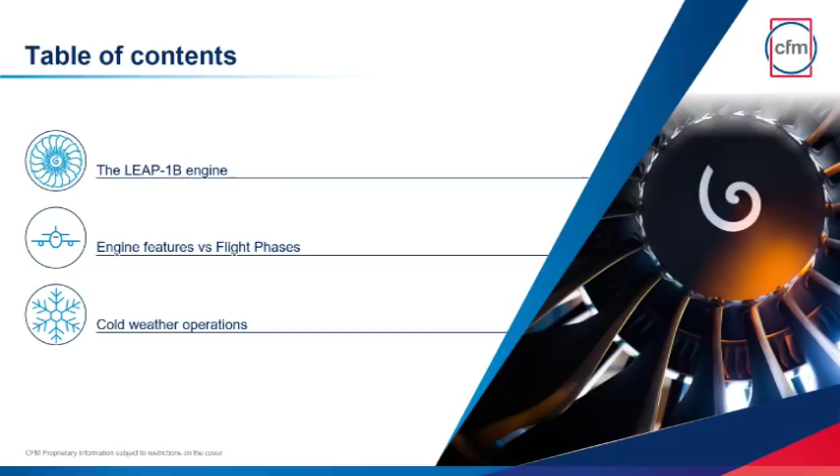Welcome to the LEAP-1B. The LEAP-1B gives its thrust to the 737 MAX family of aircraft. In this document, you'll find pilot-oriented operational explanations and tips to familiarize yourself with this new engine. We will go through the following topics: the LEAP-1B engine, engine features versus flight phases, from pre-flight phase to engine cool-down, cold weather operations. Let's begin with a short technical review.

Fuel burn. The B737 MAX has been designed to reach close to minus 15% fuel burn compared to the NG family. This target has been achieved thanks to design improvements made to the airframe, but most of it is due to a new generation of engines, the LEAP-1B family. On top of that, NOx emissions have been lowered by 50%, and the noise footprint reduced by 75%.

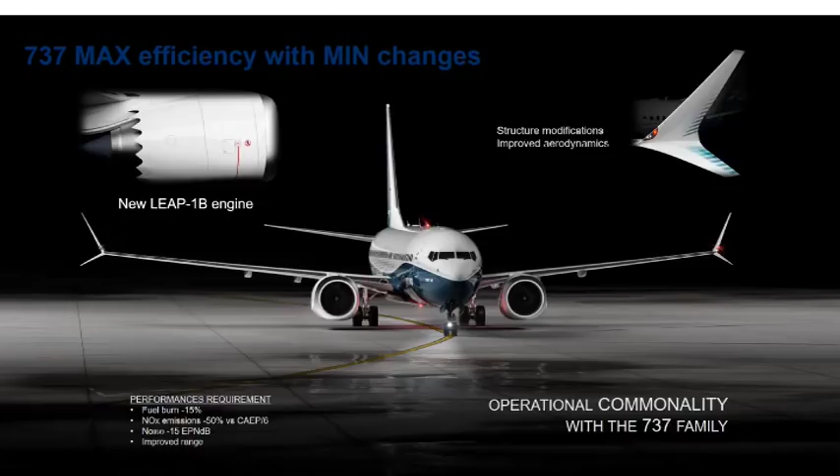From the outside of the aircraft, the LEAP-1B is bigger than a CFM 56-7B. The jet intake is 1.76 meters wide, which is 20 centimeters bigger than the one on the CFM 56-7B. The ground clearance is 43 centimeters, which is compliant with all the certification rules, and does not induce any limitations in bank angle for landing. Even in the case of a landing with the nose wheel retracted, the engines will not touch the ground.

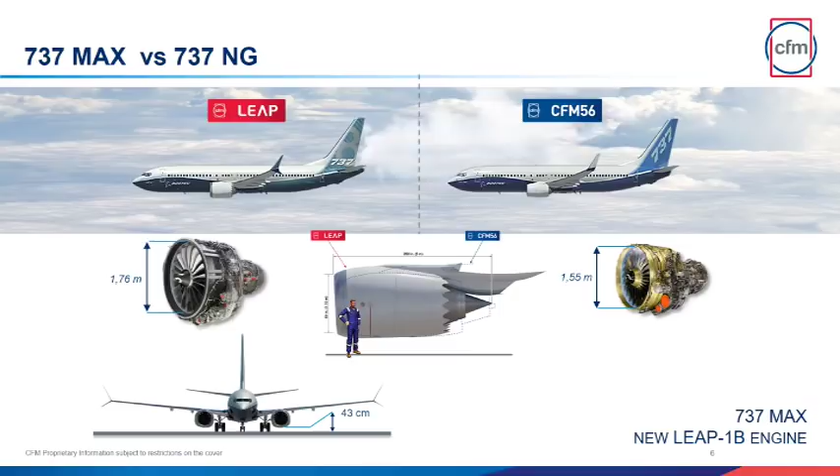The improved fuel efficiency of the LEAP-1B engine is due in part to its larger fan. The LEAP's new bypass ratio is 9:1 compared to the 5:1 bypass ratio of the CFM 56-7B. The larger bypass ratio is responsible for 50% of the LEAP-1B's gain in fuel efficiency.

The LEAP HPC's pressure ratio is now double that of the CFM 56-7B. It has increased from 11:1 in the -7B to 22:1 and is responsible for the other 50% gain in fuel savings.

The N1 red line on the LEAP remains around 104% N1, but the actual shaft speed has changed. Red line N1 shaft speed for the LEAP is 4,586 RPM, while red line N1 shaft speed for the -7B is 5,382 RPM. In contrast, the N2 red line has been increased to 117.5%, which equates to a mechanical speed of 20,171 RPM, much higher than the 15,183 RPM of the CFM 56-7B.

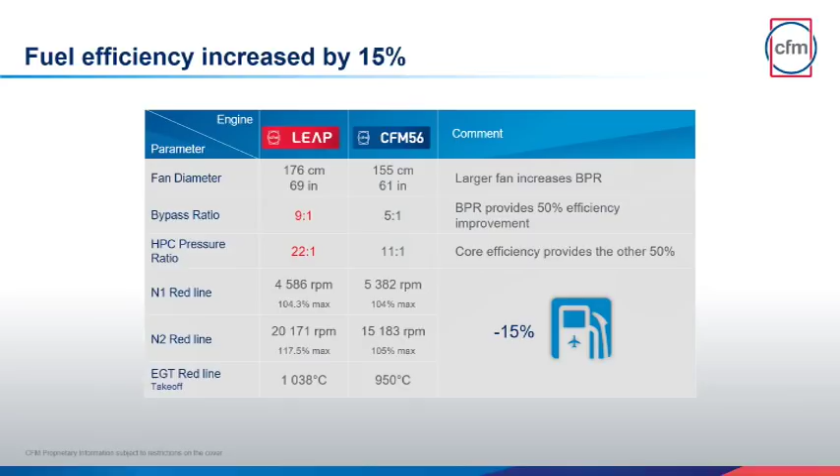Aft of the fan, the majority of the air flows into the secondary airflow, where approximately 80% of the engine's thrust is developed. The remainder of the air passing the fan enters the engine's core, becoming the primary airflow.

Primary air flows into the three-stage low-pressure compressor, also known as the booster. Between the booster and the high-pressure compressor are the variable bleed valves, or VBVs. The VBVs are designed to avoid stall occurrences in the booster by discharging a portion of the booster's air into the secondary airflow, while the engine is operating at low RPMs or during sudden RPM changes.

The VBVs open into the primary airflow and behave like scoops, catching any foreign objects that could have been ingested by the booster and evacuating them into the secondary airflow, bypassing the engine's core.

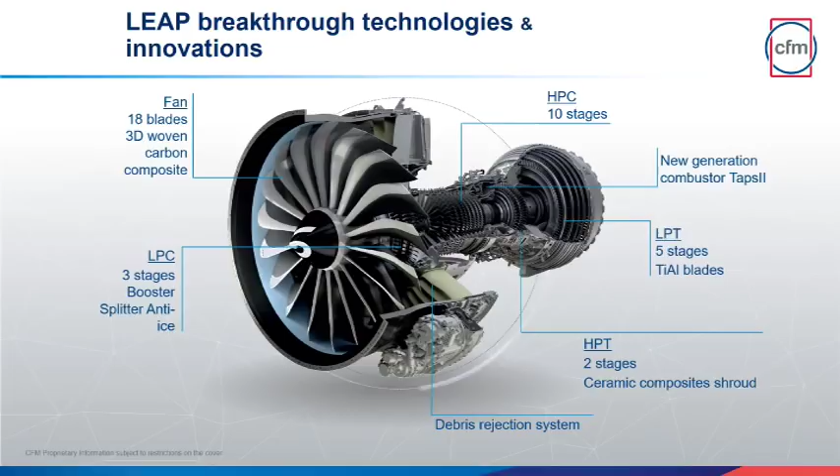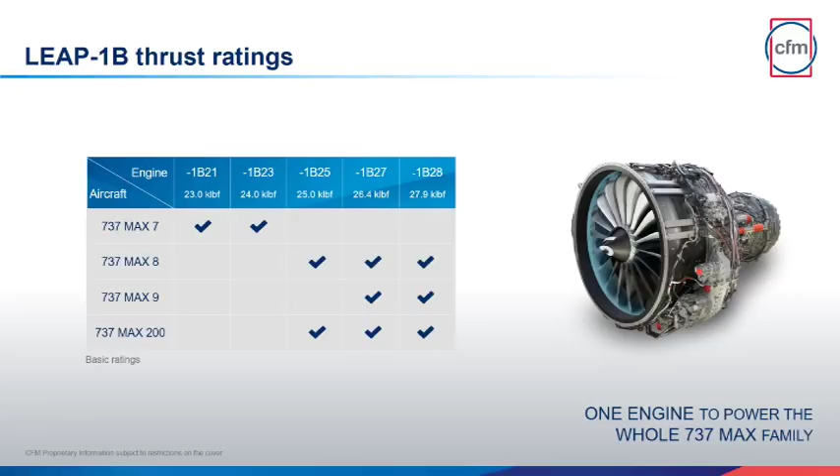The LEAP 1B family of engines provides a range of thrust from 23,000 pounds to 28,000 pounds. The only difference between these engines is the delivered thrust. The hardware is the same, but the ID plug is different. The ID plug is an electronic device plugged into the engine's FADEC computer that changes the operating characteristics of the engine, resulting in changes to its maximum thrust output.

Engine protections. The engine control is called FADEC, for Full Authority Digital Engine Control. Beyond basic engine control, the FADEC also actively protects the aircraft.

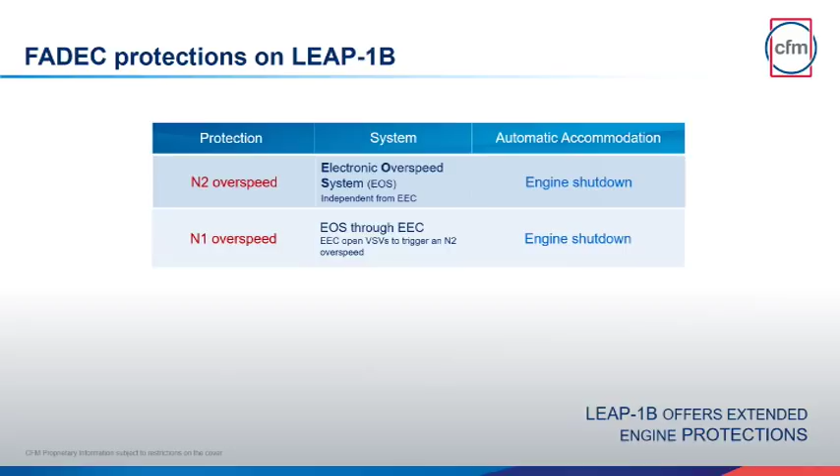In case of an N2 engine overspeed, an electronic overspeed system, EOS, independent from the main engine calculator, will command an engine shutdown to prevent it from bursting. In case of an N1 overspeed, the main calculator will detect it and will trigger the EOS, resulting in an engine shutdown as well.

Furthermore, to satisfy certification rules, the engine is equipped with a Thrust Control Malfunction Accommodation Device, known as TCMA. In case of an abnormal uncommanded engine acceleration, to avoid any lateral loss of control due to an excessive thrust dissymmetry, the TCMA will command an engine shutdown on the engine that is not responding normally. This device is only active during takeoff and touchdown phases when on the ground.

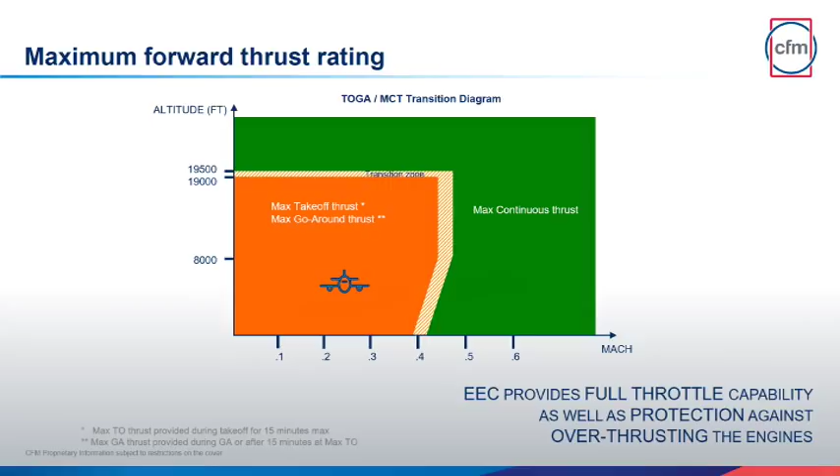Within the orange envelope, 15 minutes after takeoff, the maximum available thrust will be reduced to max go-around thrust, whatever the thrust lever position. This happens in order to protect the engine from experiencing too long of high power demand.

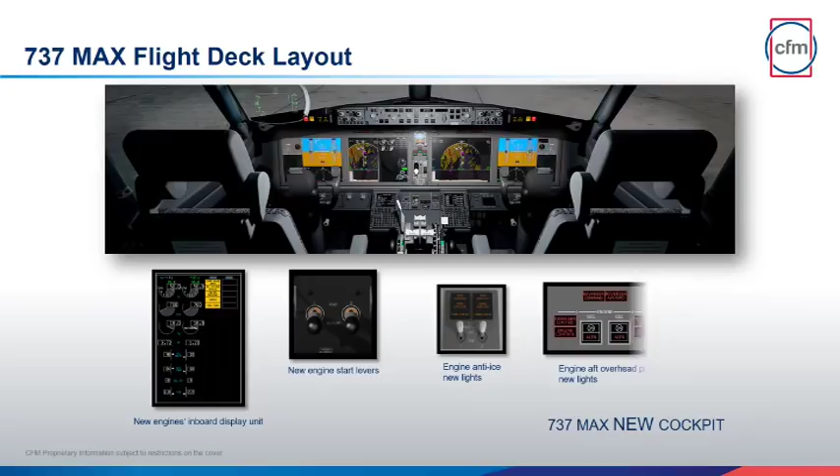New engine features versus flight phases. Pre-flight. On the flight deck, you will find a new engine inboard display unit, new engine start levers, new engine anti-ice panel, and new aft overhead engine panel lights.

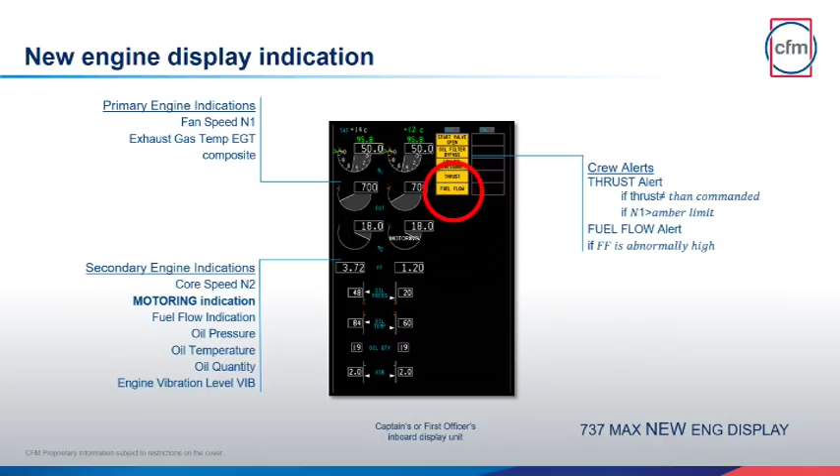On the engine parameter display, you will find two new lights. The thrust alert light, which will light up if the thrust is different from the commanded thrust, or if the N1 goes above its amber limit. And the fuel flow alert light, in case of an abnormally high fuel flow.

The engine start levers are equipped with a red light which will illuminate in the event of an engine fire or during an engine fire test.

The engine panel is also equipped with new lights. The reverser command light will illuminate if the reverser lever is not down in flight. The reverser air-ground light will announce the air-ground reverser logic has failed. And the reverser limited light will illuminate in case of an inhibited or idle-limited reverser.

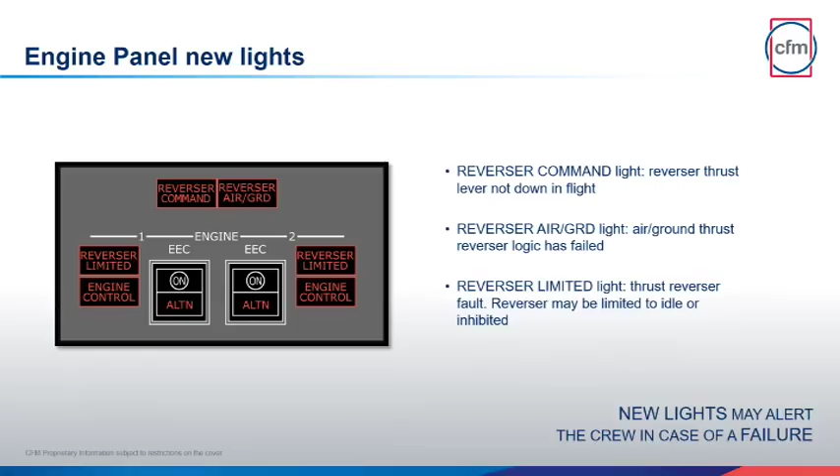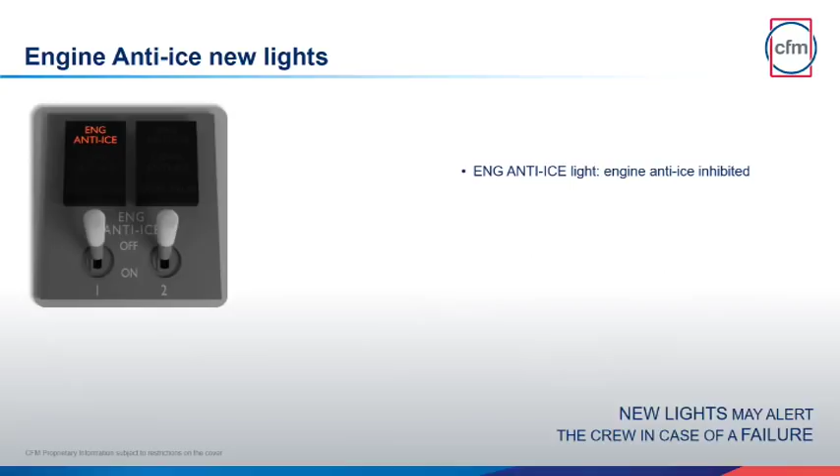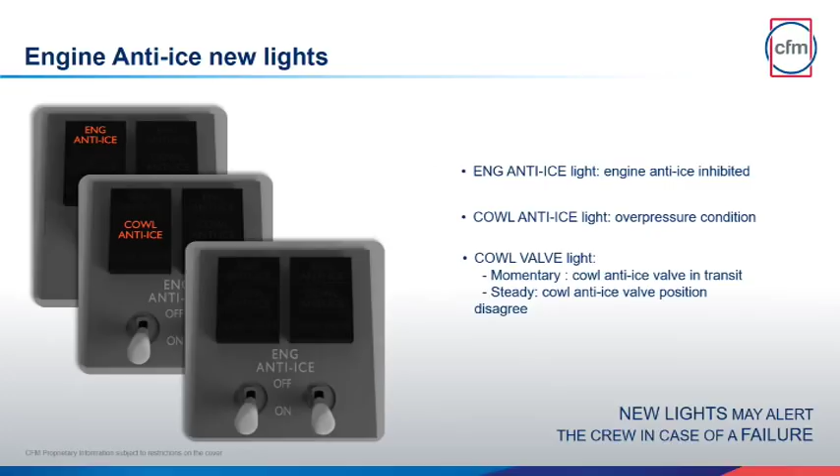The engine anti-ice panel is different from the one installed on the NG. All lights are amber. The engine anti-ice light will illuminate if the system is inhibited. The cowl anti-ice light will announce an overpressure condition. And the cowl valve light will illuminate when the cowl valve position disagrees with the switch position. Thus, it will momentarily illuminate when the related switch is moved, indicating a transient condition.

Exterior inspection. Now, let's go through a visual tour of the LEAP 1B.

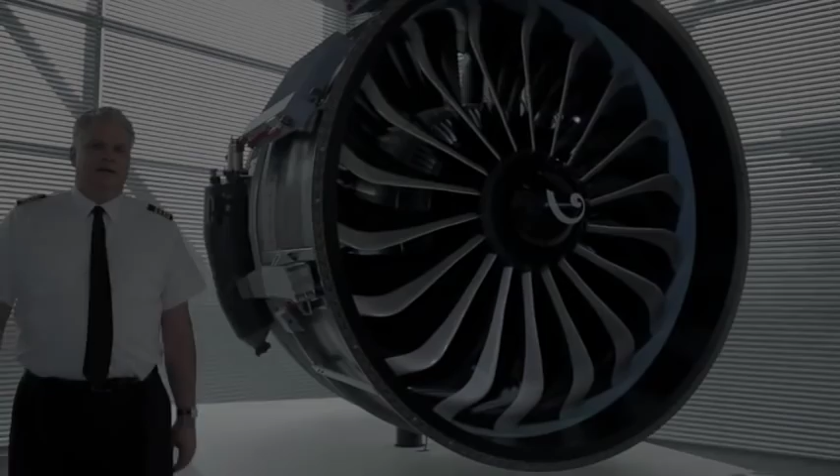Dear flight crews, you're about to operate the LEAP 1B engine on the 737 MAX family of aircraft. As this is a completely new motor, CFM wants to share with you some nice-to-know visual clues which will help you understand what you may encounter during the pre-flight visual inspection of your engines. These tips are intended to increase your knowledge of engine characteristics, thereby avoiding unnecessary maintenance actions and delays. Let's go for a short LEAP 1B visual tour, ready to fly.

In front of the engine, some details may catch your attention, especially on the front spinner, the fan blade platform edges, the fan blade tips, and the fan abradable.

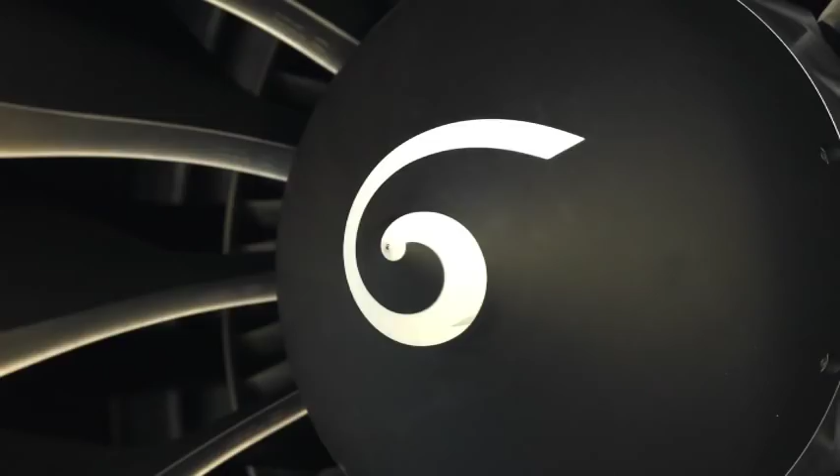You may observe some paint peeling on the front spinner. The paint peeling is due to erosion or foreign object damages, also called FOD. With paint peeling on the front spinner, the engine is perfectly serviceable.

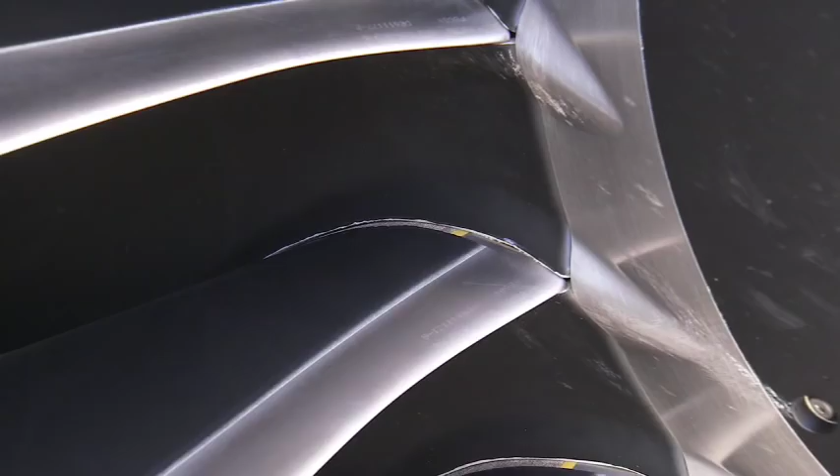You can go. On the fan blade platform edges, you may observe some irregularities. Those irregularities are due to the manufacturing process. With fan blade platform irregularities, the engine is perfectly serviceable.

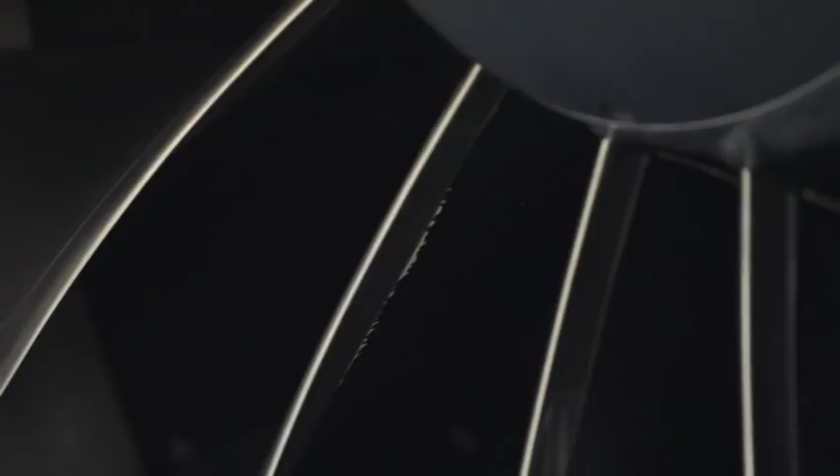You can fly. You may observe some paint peeling on the fan blades, especially on the rear side of the blades. This paint peeling is due to natural erosion. With paint peeling on your fan blades, the engine is perfectly serviceable.

You can go. Looking at the fan blade tips, you will notice a slight crease at the junction between the titanium leading edge and the body of the blade. This crease, more or less visible, exists on any blade and is due to the manufacturing process.

The engine is perfectly serviceable. You can fly. On the fan blade tips, you may observe some white dust. This dust comes from the abradable and is due to the normal breaking-in process of new production engines. With this white dust, the engine is perfectly serviceable.

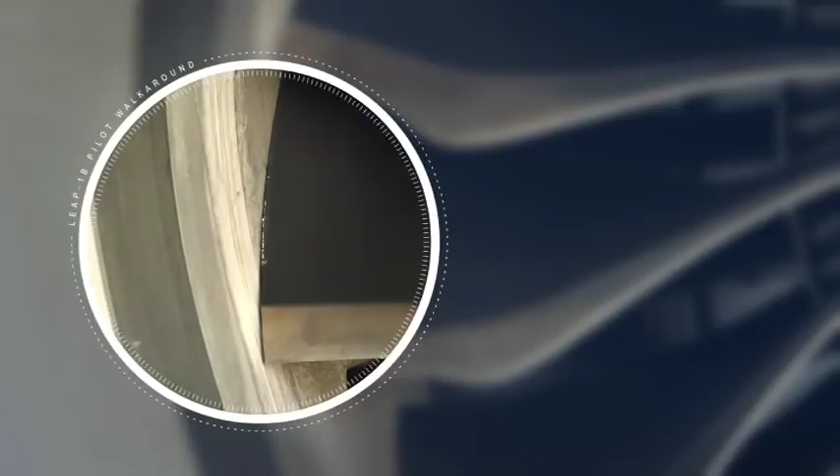You can fly. You may also notice some deteriorated fan blade tips with melted resin and sometimes visible frayed carbon fibers. This deterioration is due to contact between the fan blade tip and the surrounding abradable during the normal breaking-in process of new production engines. With this kind of deterioration, the engine is perfectly serviceable.

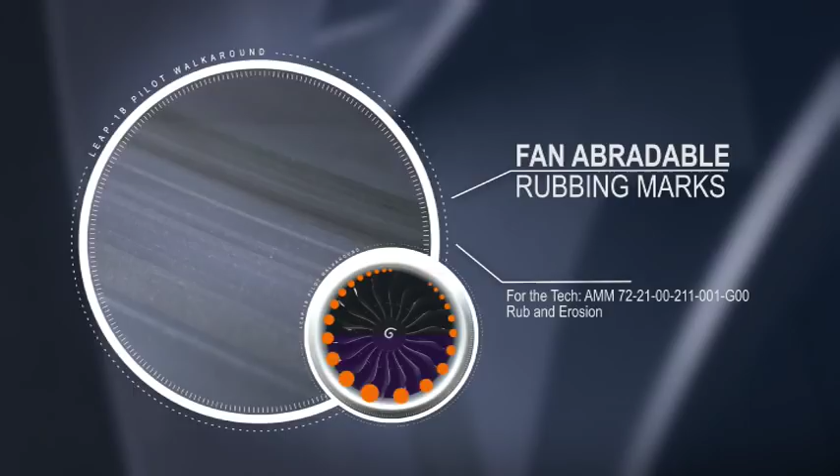You can fly. On the light gray color of the fan abradable, you will notice rubbing marks. The color of the rubbing varies from black to light gray. Furthermore, most of the rubbing will be located, although it may not be limited to, the 6 o'clock position. Those marks are due to the normal breaking-in process of new production engines. Whatever the color or location of the rubbing, the engine is perfectly serviceable.

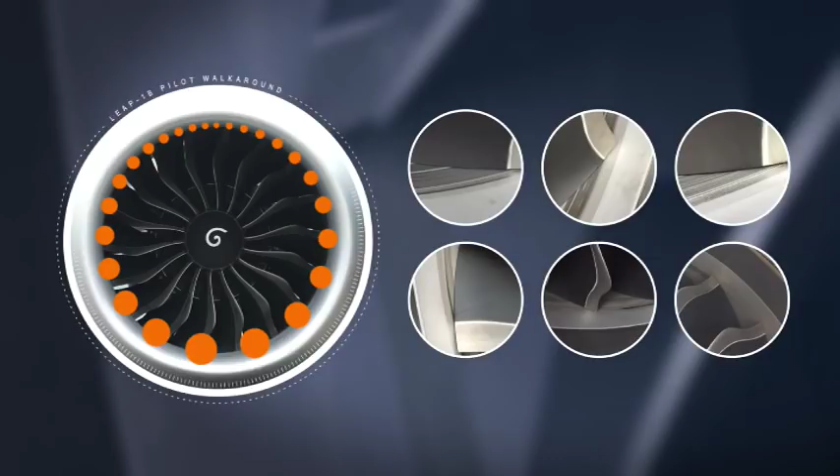You can fly. Looking at the fan abradable, you may notice some cracks. As long as those cracks are axial cracks that just look like a fine axial line on the surface of the abradable, the engine is perfectly serviceable.

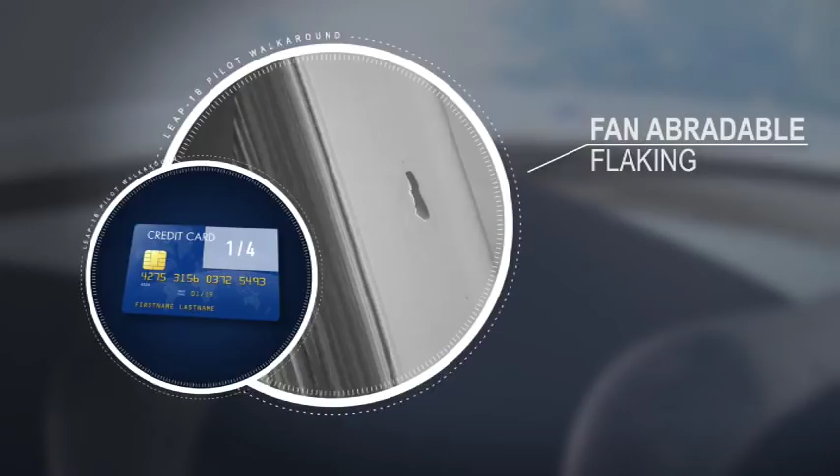You can go. When you have a close look at the fan abradable, you may notice some flaking in the material. This flaking, or presence of small craters, is due to the presence of little air bubbles in the material, or FOD. If the surface of the missing material is larger than 1/4 of the surface of a credit card, or if you can see the structural carbon fiber of the composite fan case, ask a technician.

The technician will refer to the aircraft maintenance manual to decide if the engine is serviceable. If the surface of the crater is smaller than 1/4 of the surface of a credit card, and you do not see the structural carbon fiber of the casing, the engine is perfectly serviceable.

You can go. On the fan abradable, you may notice some spots and fills. Those spots and fills are the result of a repaired crater in the abradable. With spots and fills, the engine is perfectly serviceable.

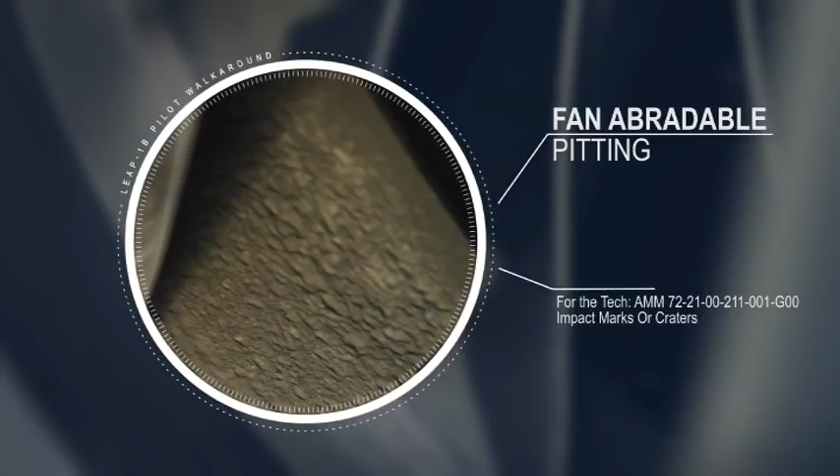You can go. Looking at the abradable just behind the fan, on the circumference, you may observe some pitting. This pitting is the result of encountering severe icing conditions. With these kinds of small impacts, the engine is perfectly serviceable.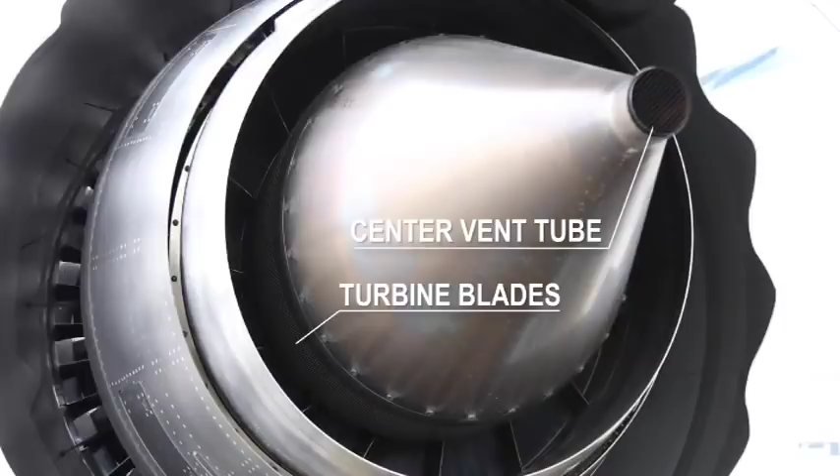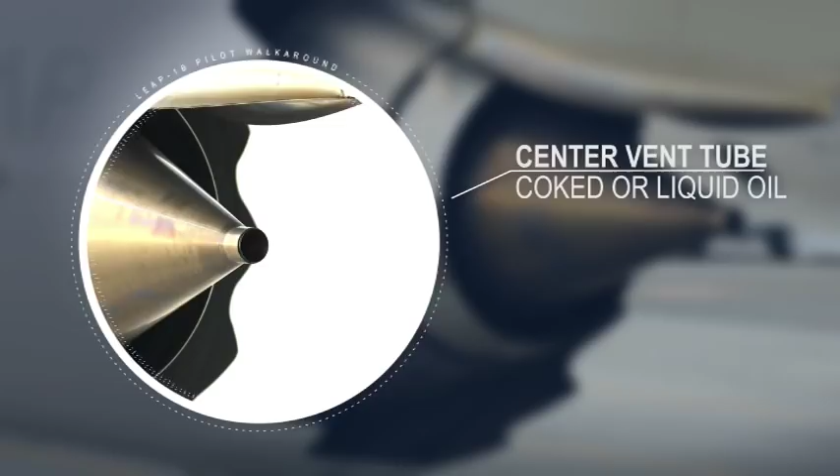You can fly. Looking at the engine from the rear, some details may catch your attention: inside the center vent tube, and on the low-pressure turbine blades. Inside the center vent tube, you will probably observe some coked oil, with or without the presence of liquid oil. This oil, whatever its physical appearance, is normal and comes from the engine's air pressurization internal circuits.

Additionally, just after a flight, you may notice some smoke exhausting from the center vent tube. This smoke is just oil vapor. With oil vapor, liquid oil, or coked oil in the center vent tube, the engine is perfectly serviceable.

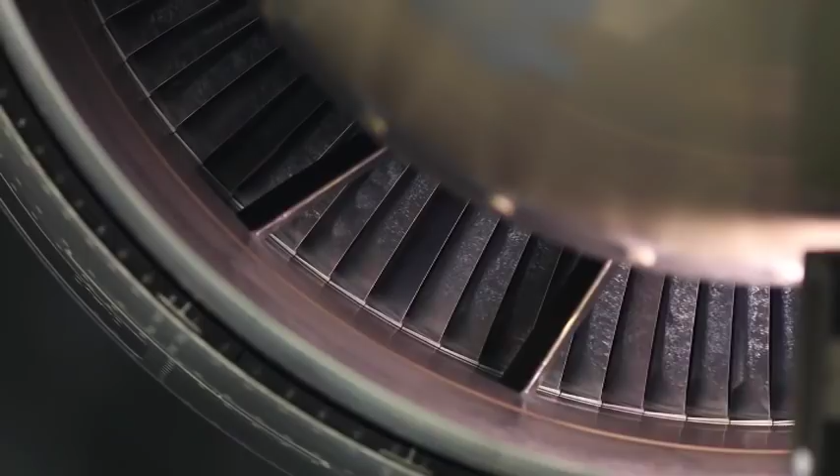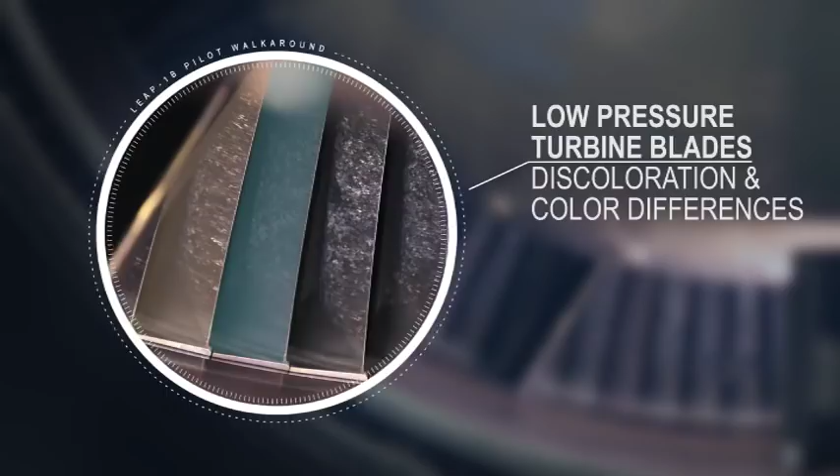You can go. Looking at the low-pressure turbine blades, you may observe ripples along the whole length of the blades. Those ripples are due to the manufacturing process. Furthermore, you may note a discoloration of the metal, and sometimes a different color between blades.

This discoloration is due to the high temperature exposure of those parts, and the color difference is explained by slightly different manufacturing processes, depending on the manufacturer of the blades. Whatever the color of the low-pressure turbine blades, the engine is perfectly serviceable.

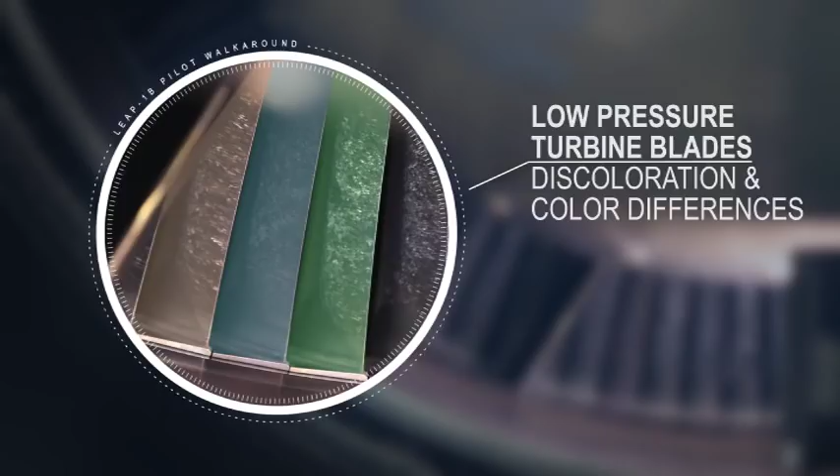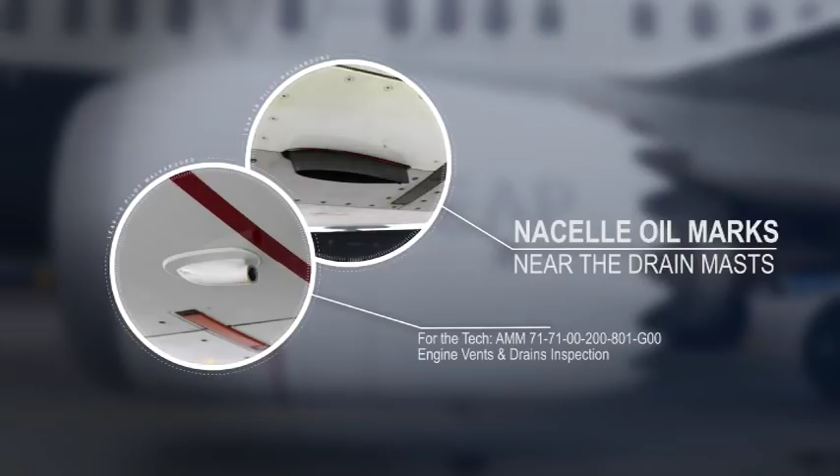You can go. Looking at the side of the engine, some details may catch your attention, especially around and below the drain masts. The LEAP 1B is equipped with 2 drain masts. Around those masts, you may observe some oil marks. If there is no visible oil leak, just oil marks, the engine is perfectly serviceable.

You can fly. Sometimes you will notice, below the drain masts, small oil or fuel puddles. These puddles come from the different drain masts. With no visible oil or fuel leak, just a small puddle, the engine is perfectly serviceable.

You can fly. In case of an unsafe condition of the fan cowl, some warnings should catch your attention. One of the latches might not be locked, and sometimes an abnormal spacing between the fan cowl and the rest of the nacelle may be visible. In this situation, a corrective action has to be done before you can safely fly the aircraft.

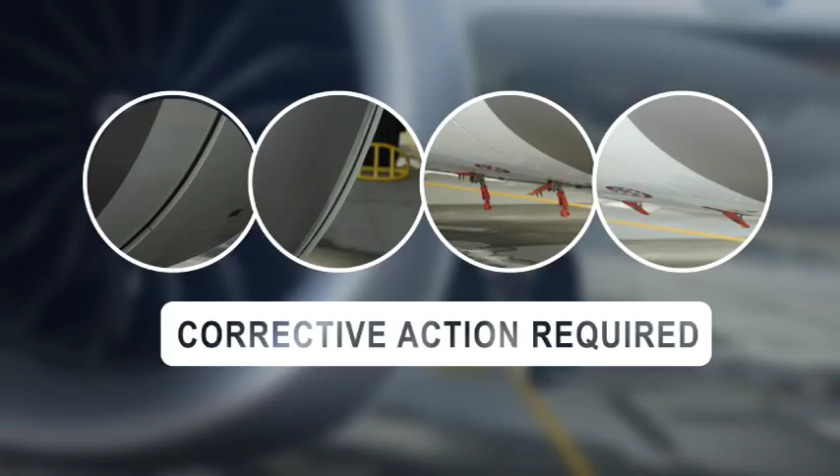On the ground, the LEAP 1B sounds different from the CFM 56. Waiting for the aircraft to reach the apron before your flight, during the engine shutdown sequence, you may hear a pressurized air noise.

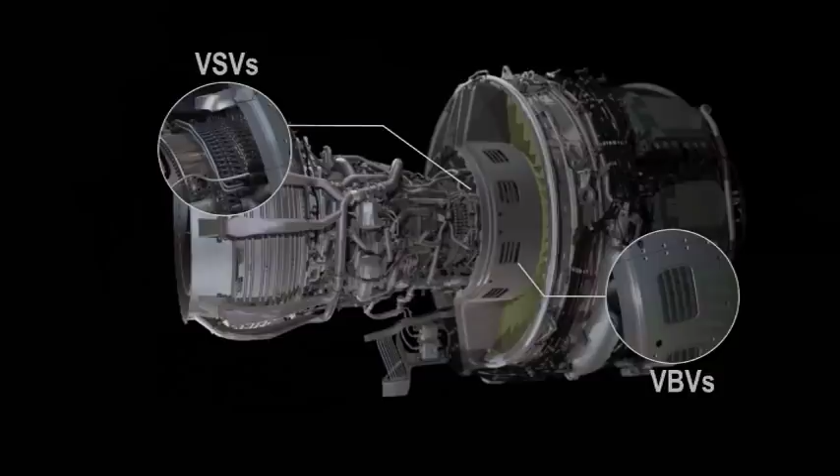This noise is due to the closing of the variable stator vanes, also called VSVs, and the opening of the variable bleed valves, known as VBVs. This noise is normal. The engine is serviceable. You can fly.

In certain circumstances, for a short period of time, a grinding noise might be heard. This noise comes from the low-pressure turbine blades rubbing on their seals. The engine is perfectly serviceable. You can go.

If for any reason, with the engine spinning slowly during the walk-around, you would like to stop the fan, do not stop it by grabbing one of the fan blades. Due to the size and shape of the blades, grabbing a blade could make it twist and gouge into the fan abradable. It could also hurt you.

If you want to stop the fan, it is recommended to use your hands on the front spinner to slow down the fan until it stops. Doing so, pay attention not to scratch the spinner surface with rings or wristwatches.

Dear flight crews, the engine is now yours. Take care of it for a safe and long time on wing with no delays or cancellations. Enjoy your new LEAP 1B.

Engine start procedure.

The outstanding efficiency of the LEAP-1B is due to its technical architecture. But this architecture is subject to a bowed rotor effect on engine start when the engine is not cold. The LEAP-1B reaches cold status after a ground stop of 6 to 8 hours.

Ground stops shorter than 6 to 8 hours usually result in starting engines already warm from residual heat. Short ground stops contribute to bowed rotor effect on engine start.

To manage the bowed rotor effect prior to start, it is important to minimize the temperature gradient within the engine. Minimizing any temperature gradient within the engine will help maintain clearance control in rotating hardware and ensure performance retention. This is done thanks to the bowed rotor motoring logic, which is active on the ground only.

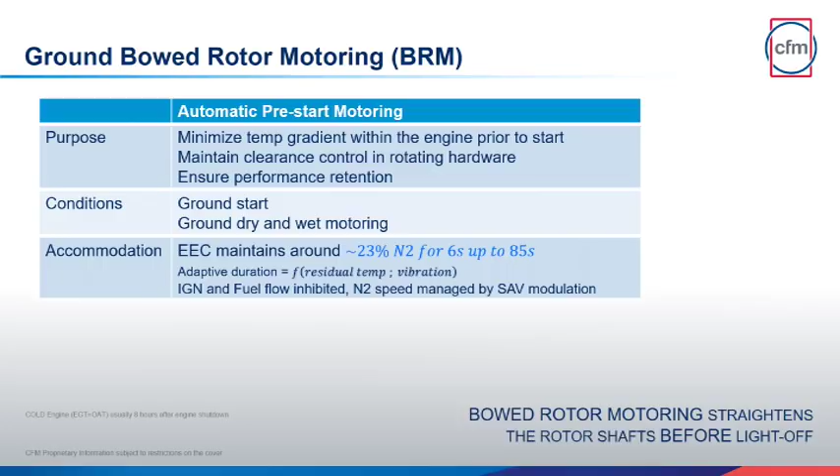During the startup sequence, the electronic engine control, EEC, will maintain N2 around 23% for 6 to 85 seconds, depending on the thermal state of the engine. The motoring message is displayed on the N2 indication during that phase.

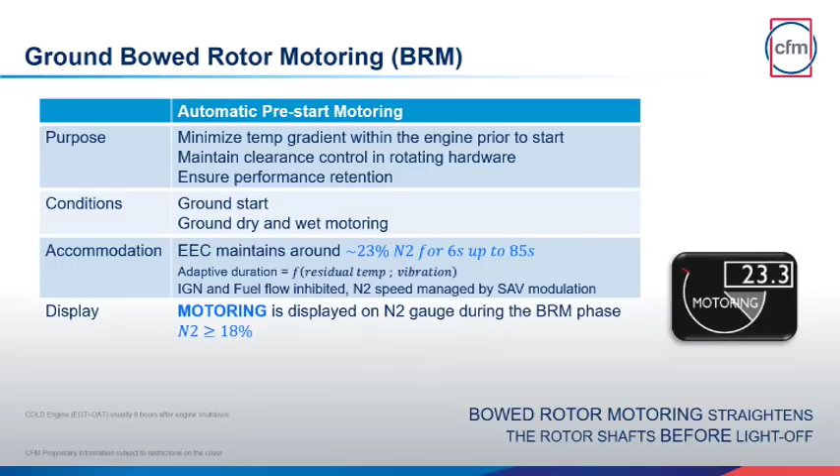Additionally, when the engine start lever is set to the idle position, an embedded functional test is done before light off. This protocol checks the status of the thrust control malfunction accommodation, TCMA, and the electronic overspeed system, EOS.

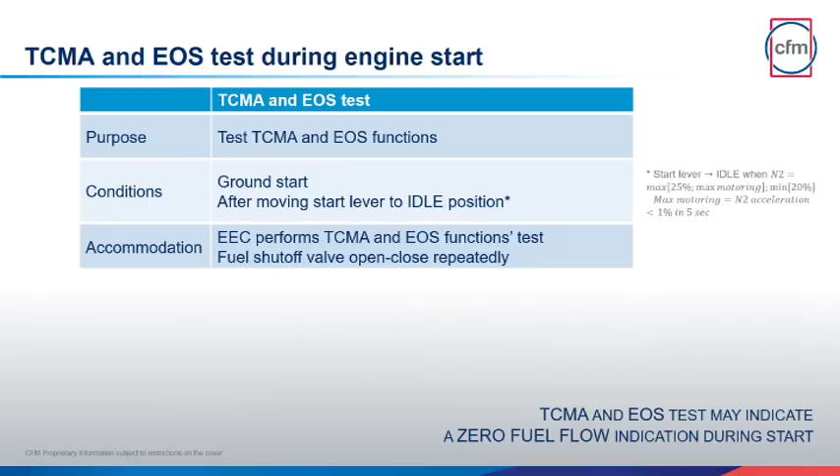As an operational consequence, you will notice that the fuel flow indicator will read 0 for 3 to 10 seconds, with the bright blue engine valve close light illuminated.

This graph represents the N2 over time during a cold engine startup sequence. After the engine start switch has been rotated to the ground position, the N2 will increase. The motoring indication will appear on the N2 gauge around 18% N2. A slight inflection will be observed around 20% N2, and the engine will then spool up again.

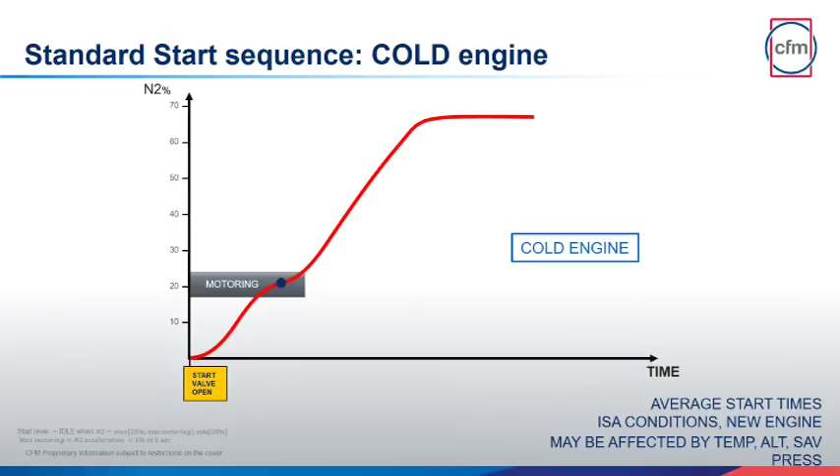After the motoring message has disappeared, reaching 25% or max motoring, the start lever has to be set to the idle position. At 63%, the start switch will go to the off position, and the start valve open light will go off. With a cold engine, you can expect a startup duration around 90 seconds.

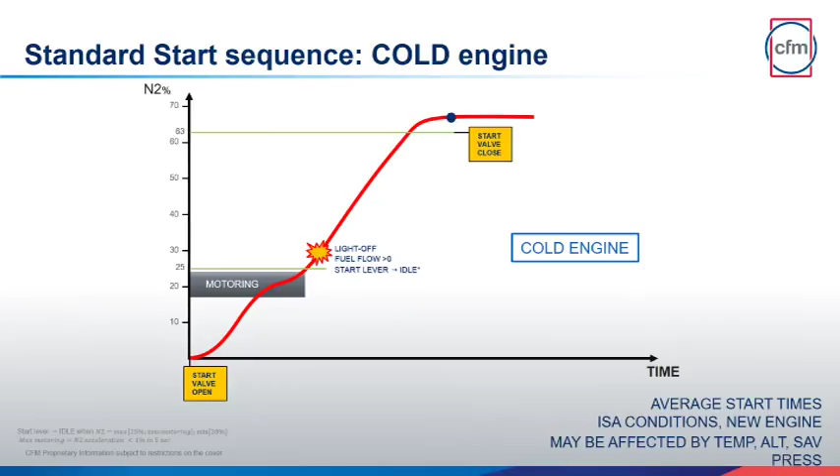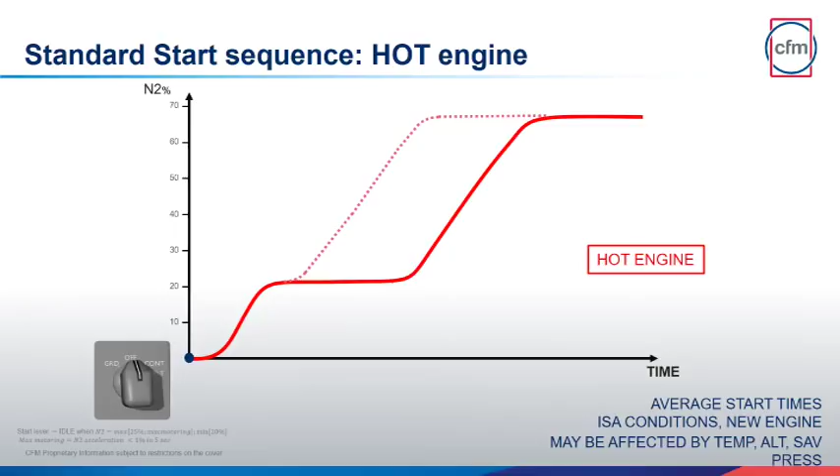This graph represents the N2 over time during a hot engine startup sequence. After the engine start switch has been rotated to the ground position, the N2 will increase. The motoring indication will appear on the N2 gauge around 18% N2.

The N2 will be maintained around 23% for a period of time from 6 to 85 seconds. This is the bowed rotor motoring. Then, the engine will spool up again.

After the motoring message has disappeared, reaching 25% or max motoring, the start lever has to be set to the idle position. At 63%, the start switch will go to the off position, and the start valve open light will go off. With a hot engine, you can expect a startup duration between 91 and 120 seconds.

Note: the extended bowed rotor motoring cycle will also occur during the first start after new engine installation, or if EEC logic is updated.

During any ground start, the electronic engine control protects the hardware from anomalies such as hot start, over temperature, no light off situation 15 seconds after the start lever is moved to idle detent, and start stall.

CFM recommends not to intervene during the startup sequence and let the EEC do its job. If an aborted start is necessary, the EEC will automatically abort the start by turning off fuel and ignition. Allowing the EEC to abort the start instead of manually aborting the start will allow the full benefit of the EEC adaptive start capabilities during the next ground start.

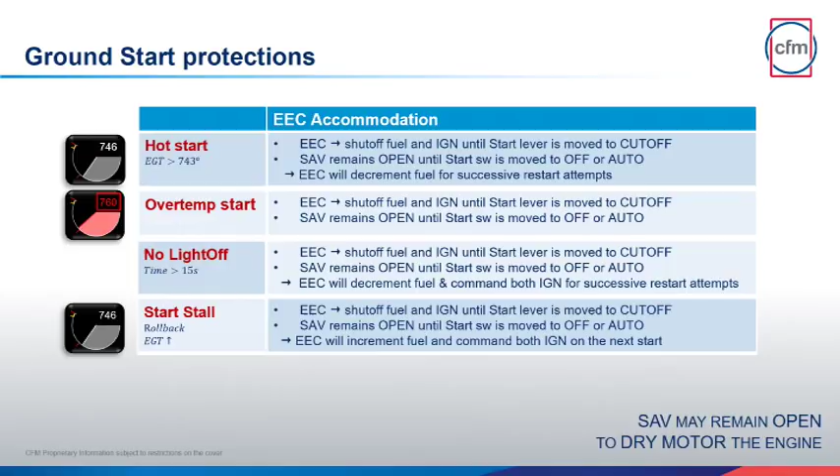After an automatic start abort, the EEC will keep the engine motoring and will adjust the fuel flow schedule for the next startup attempt. The flight crew will have to set the engine start lever to the cutoff position once the EEC has aborted the sequence.

During the start sequence, it is not unusual to see EGT levels very near the start EGT limit. The rate of EGT increase is typically low when approaching the start EGT limit. Be patient. The EEC will manage that situation without any pilot intervention.

Furthermore, the LEAP-1B usually has two subtle EGT and N2 rollbacks, or slower rate of increase. The first typically occurs after starter cutout. The second rollback occurs just prior to the engine reaching stable idle.

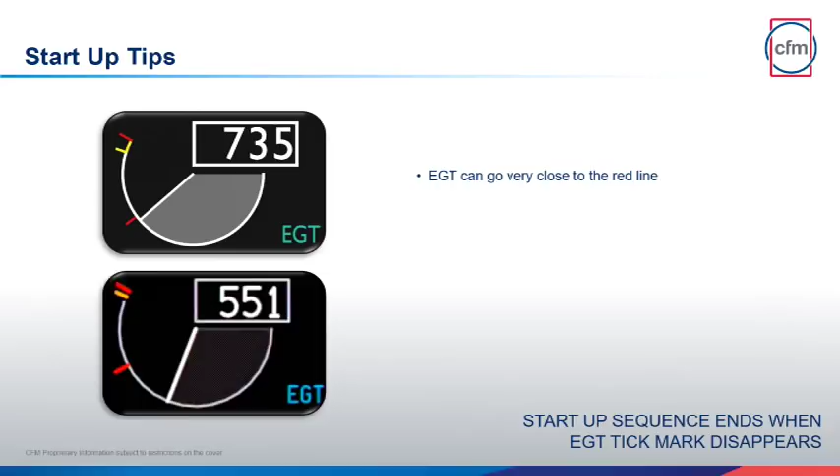The EGT and N2 rollbacks are not a sign that the startup sequence is complete, and no bleed configuration changes or generator selections should be accomplished until the start EGT tick mark disappears from the EGT indication. The disappearance of the start EGT limit is the indication that the start process is complete.

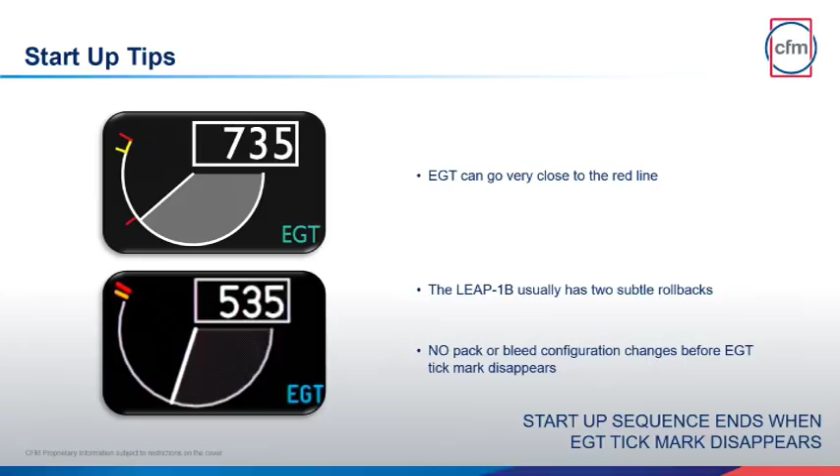Let's now have a look at cold and hot engine startup sequences.

LEAP-1B startup sequence. Cold engine. Engine start switch rotated to the ground position. EEC powered. Start valves open and red tick mark appears on the EGT gauge. Residual EGT shows the engine is cold. 18% N2, motoring indication displayed.

N2 keeps spooling up. 25% N2, start lever moved to the idle detent. Fuel flow at 0 for a few seconds. Fuel flow increases and light off.

The EGT peaks can go very close to the EGT red line. First EGT peak. Second EGT peak. 63% N2, start switch rotates to the off position. Starter cutout. It is not unusual to see another EGT peak after starter cutout. EGT red tick mark disappears, indicating the end of the startup sequence.

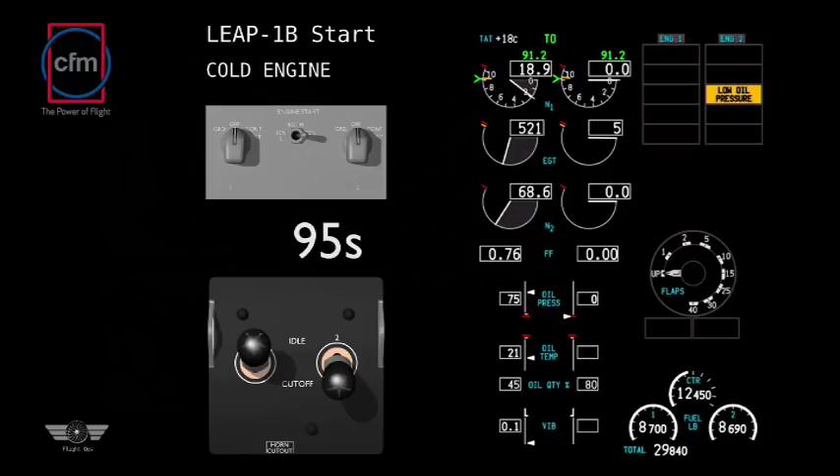Hot engine. Engine start switch rotated to the ground position. EEC powered. Start valve opens and red tick mark appears on the EGT gauge. Residual EGT shows the engine is hot. 18% N2, motoring indication displayed.

N2 stabilizes around 23% and the motoring indication remains visible. Motoring disappears and N2 spools up again.

25% N2, start lever moved to the idle detent. Fuel flow at 0 for a few seconds. Fuel flow increases and light off.

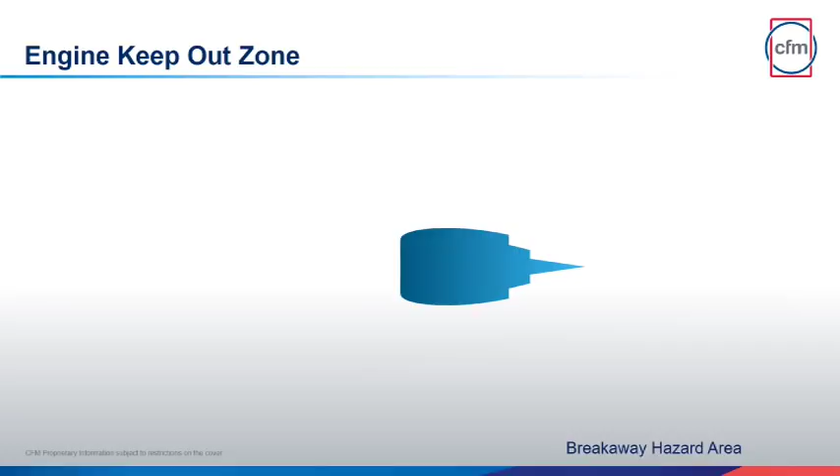Taxi. The LEAP 1B keep-out zone is larger than the CFM 56 zone. Keep this in mind when you are beginning to taxi or approaching the apron for the safety of ground personnel.

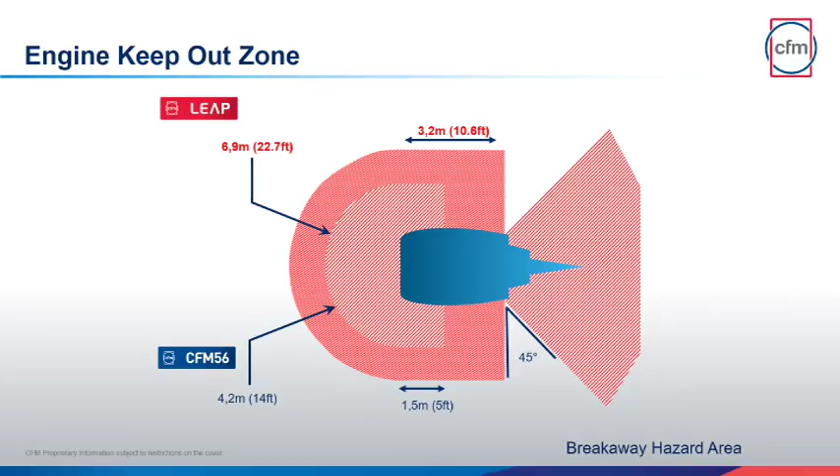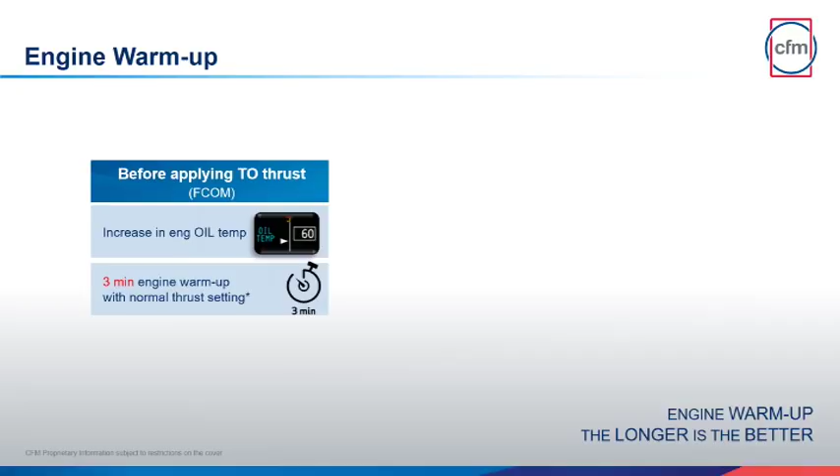Engine warm-up. Before applying takeoff thrust, there are two very important points to check. Look for an increase in oil temperature. Make sure the engine has 3 minutes of warm-up. The minimum oil temperature prior to setting takeoff thrust is 31 degrees Celsius.

For cold-soaked engines, extending the engine warm-up time to 5 minutes is beneficial to slightly lower EGT during high-thrust takeoffs. This is often beneficial at higher altitude airports, where higher thrust levels are typically required.

Takeoff. Let's have a look at the thrust reduction methods. Today, with this current temperature and using max takeoff thrust, you could take off at max takeoff weight. But today, your current takeoff weight is lighter than the max takeoff weight. Thus, what lower thrust level would be sufficient thrust to use for takeoff at this takeoff weight?

It is the thrust the engine would produce if the current outside air temperature was the assumed temperature. This target thrust is computed with the current conditions of the day, leading to a reduced takeoff N1 and a reduced takeoff EGT. Refer to the FMC options for the maximum possible thrust reduction using the assumed temperature method.

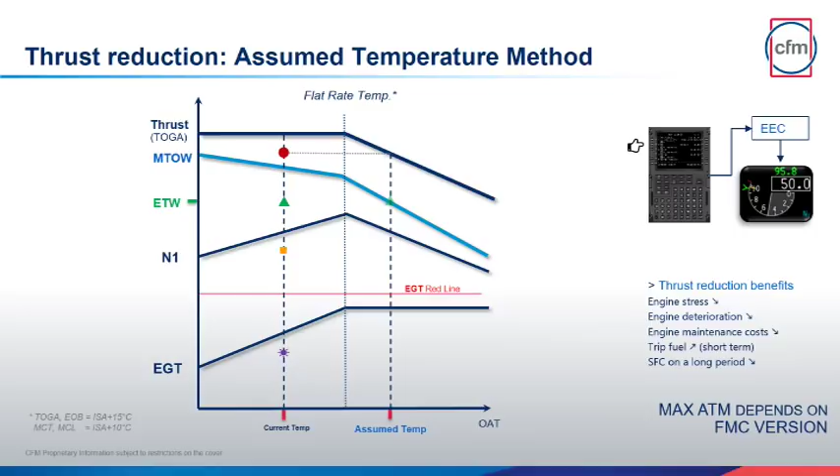The other way of reducing the takeoff thrust is to use a fixed derate. The fixed derate levels correspond with the derate options selected from the FMC. The fixed derate option limits the takeoff thrust to the selected fixed derate, which is the basis for takeoff performance calculations.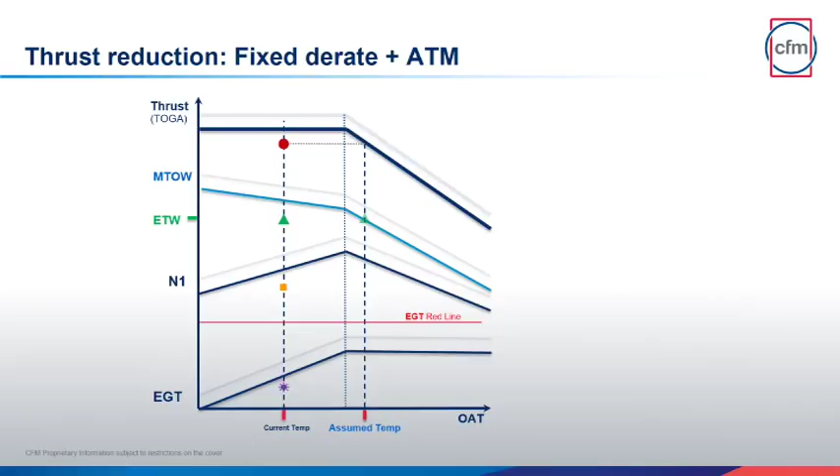It is possible to apply the assumed temperature method with a fixed derate thrust. In this case, the computation lines of the derated engine start at lower levels. Once the fixed derate has been chosen, the assumed temperature method is applied. As the baselines are lower, the new assumed temperature might be lower, but the overall thrust reduction can be equal or greater than using the assumed temperature method alone. Refer to your FCOM for maximum thrust reduction authorized.

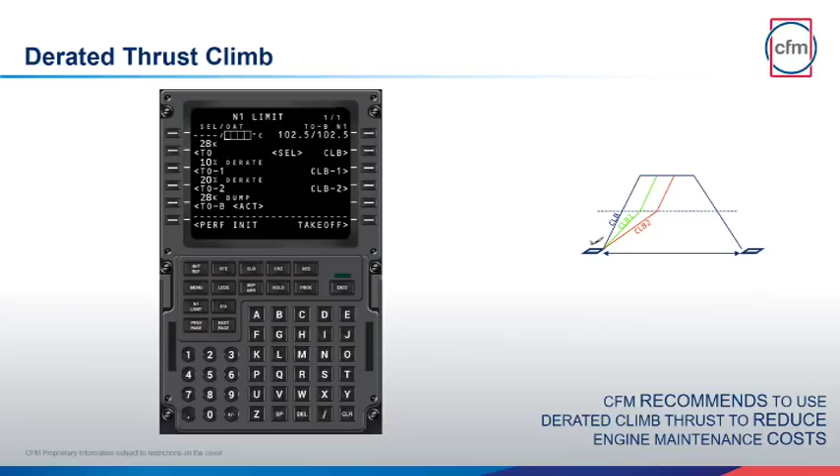Climb. The FMC will automatically calculate the best climb thrust based on the takeoff thrust level. CFM recommends using the automatically armed climb thrust instead of manually selecting a higher climb thrust, to minimize overall engine deterioration.

Cruise. In cruise, you will notice that the LEAP 1B fuel flow is much lower than the CFM 56 one. Sometimes you will even read values lower than 1 ton per hour.

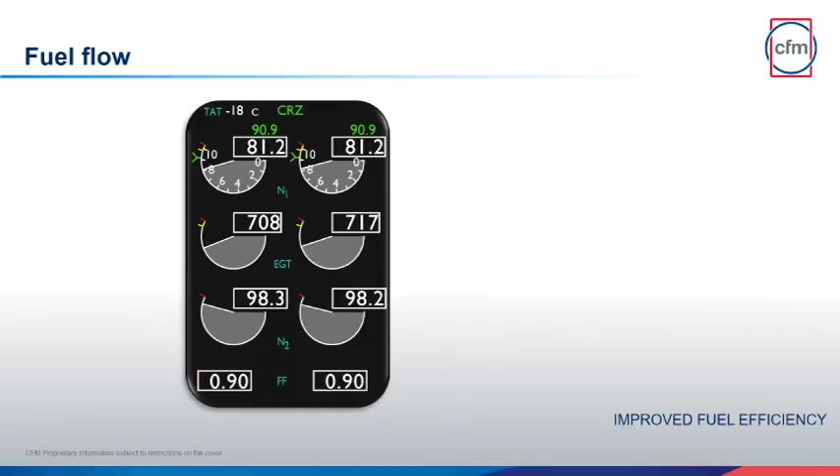In flight, in case of an engine flameout, the EEC will activate the auto relight feature. If you need to manually restart one engine, be aware that in contrast to what is done on the ground, the EEC will never shut down the engine in case of hot start or overtemp situation. Nevertheless, CFM recommends you let the EEC do its job. If a hot start situation is detected in flight, the white flashing box will appear, and the EEC will interrupt fuel and ignition for 1.2 seconds to avoid reaching the EGT red line. However, the start process will continue. You'll need to abort the start sequence in flight only in the case of an overtemp situation, indicated with the red box.

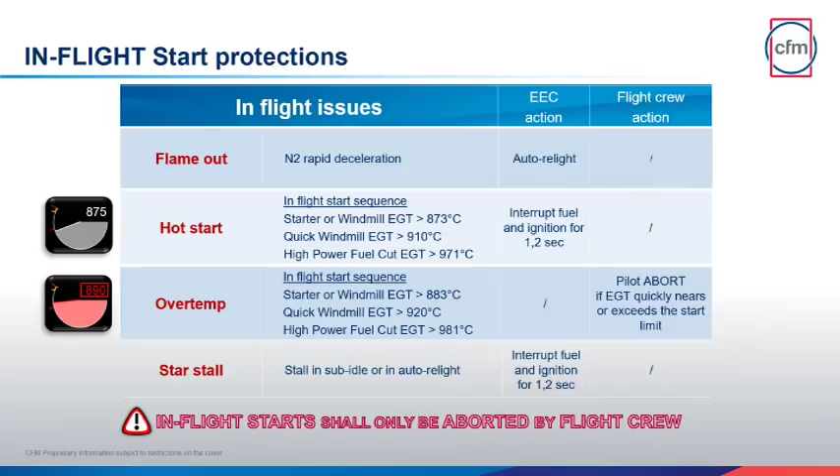Furthermore, if a start stall is detected, the EEC will interrupt fuel and ignition for 1.2 seconds, then continue with the start process. The flight crew has nothing to do, just monitor the EGT red line.

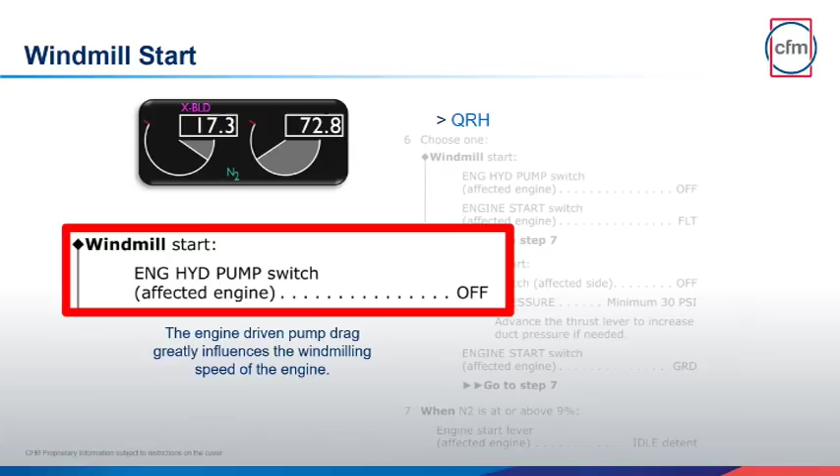If you need to perform a windmill start, carefully read the non-normal checklist. You will see that there is an additional step asking to switch off the engine hydraulic pump on the affected engine. This is important because engine-driven pump drag greatly influences the windmilling speed of the engine.

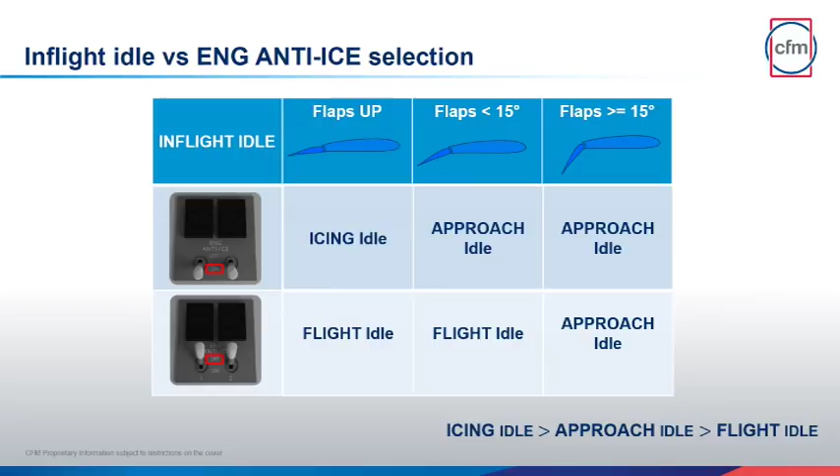Descent. Depending on the flap's position and the engine anti-ice status, the flight idle thrust changes. This table comes from the FCOM. Just be aware that icing idle is higher than approach idle, which is itself higher than flight idle.

Landing. Thanks to its higher bypass ratio, the LEAP 1B thrust reverser is very effective. CFM recommends coming out of max reverse by 70 knots to minimize the potential for reverse gas flow and FOD ingestion.

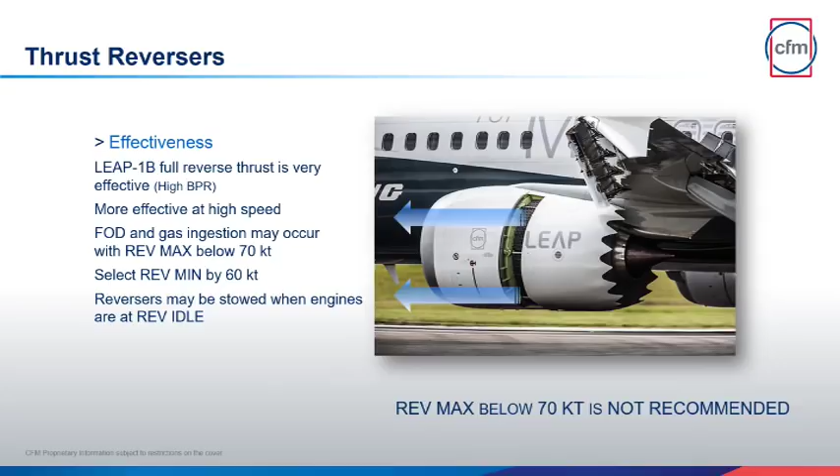Engine cooldown. The cooldown period can begin when the aircraft is on the ground at idle thrust. Thus, if an idle reverse landing is performed, the cooldown time begins at touchdown. If reverse thrust higher than idle is used, the cooldown time starts when the engines are returned to idle thrust. The minimum required cooldown time is 3 minutes and must be followed to minimize the potential for oil and fuel coking effects. Those fluids will bake into coke when in contact with hot parts.

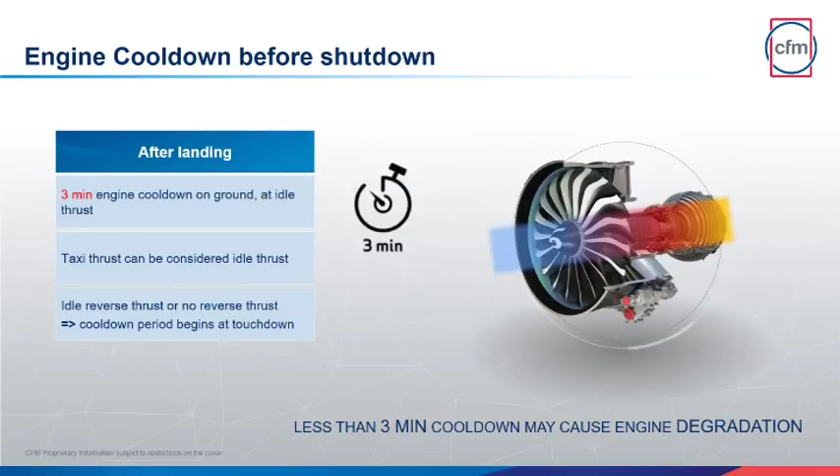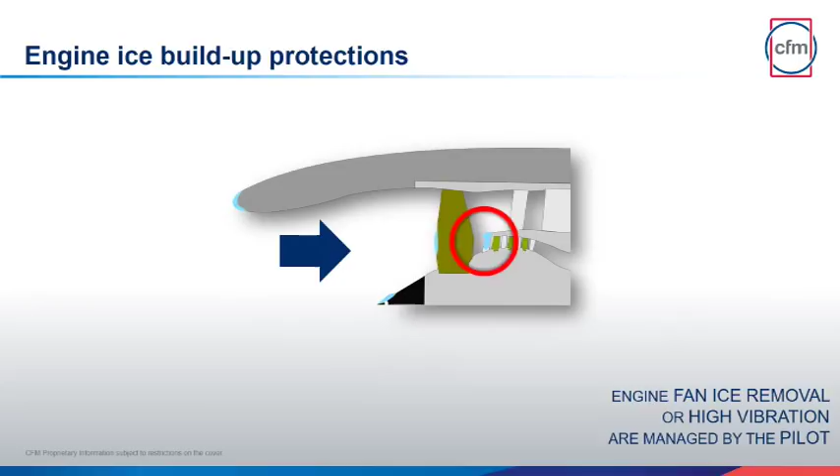Cold weather operations. Here are the different parts subject to icing in the LEAP 1B: the engine air inlet, the front spinner, the fan blades, and the booster splitter. For the air inlet, use the engine anti-ice switches. Note that all lights are now amber.

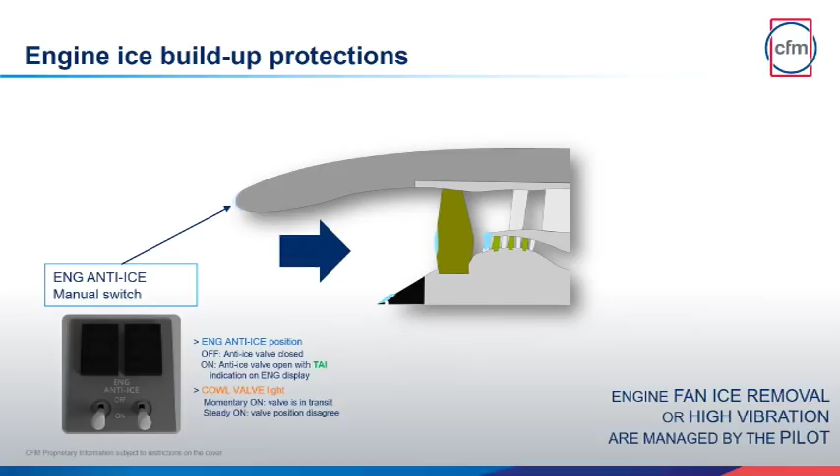For the front spinner and the fan blades, use the fan ice removal procedure when flying in moderate to severe icing conditions. It is the only way to be protected from ice accumulation on the spinner and the fan blades. As for the booster splitter, it is automatically de-iced. The EEC controls this feature, which is activated at low RPM. There is no cockpit indication of the system activation.

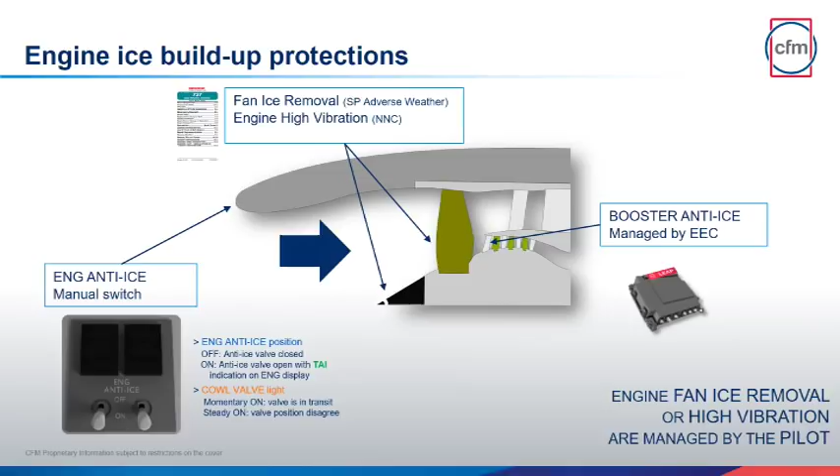The booster splitter can be subject to ice accretion. To de-ice this area, hot air is injected in the splitter and blown onto the blades of the first stator stage. The LEAP 1B can also defend the engine's core from ice crystal icing conditions. To prevent ice accumulation in the core, the EEC will command an opening and closure cycle of the variable bleed valves. This is automatic, and there is no cockpit indication.

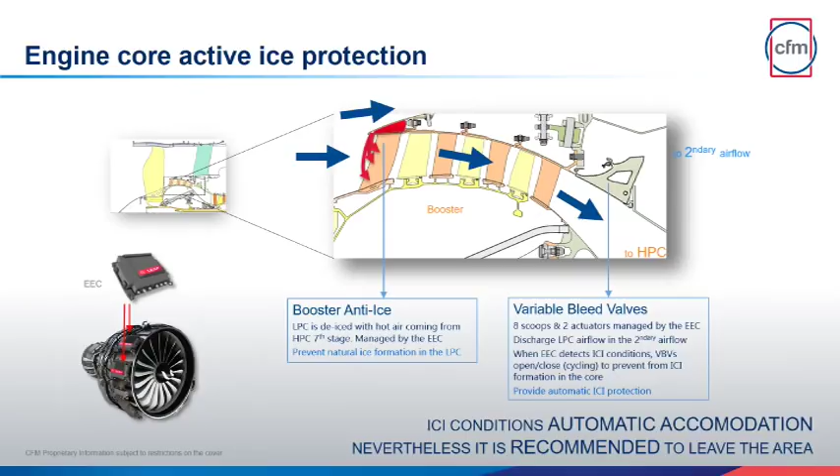A slight change in EGT might be observable. Nevertheless, if ice crystal icing is suspected, CFM recommends to leave the area, as you would do with a CFM 56-7B. For taxiing in icing conditions, refer to your FCOM. The LEAP 1B ice shed procedures are required when operating in ground icing conditions.